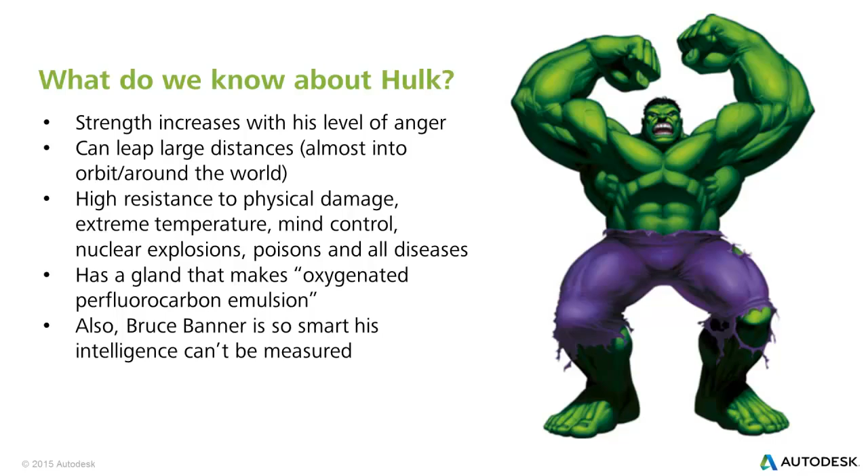Has a gland, oh this is a good one, that makes oxygenated perfluorocarbon emulsion. I guess that's a fancy way of saying he can breathe underwater. And also, when he's Bruce Banner, he's so smart that his intelligence can't be tested. That is pretty smart. So what actually matters for us? Well, none of that. All that really matters is that the Hulk is a big fatty.

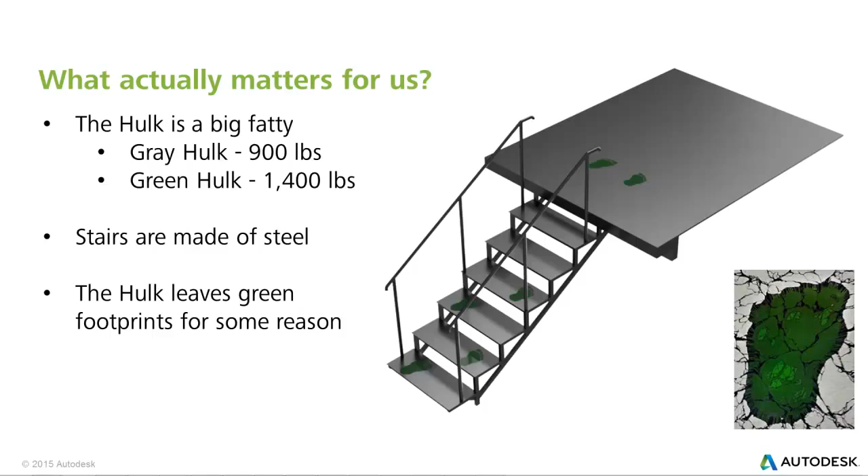So like all of these superheroes I'm finding out, there are multiple versions. Gray Hulk, which I didn't know exists, is a 900-pound fatty. Green Hulk can get all the way up to 1,400 pounds, so that's what we're going to be looking at while he walks his way up some steel stairs. And also he leaves green footprints, because why wouldn't he leave green footprints?

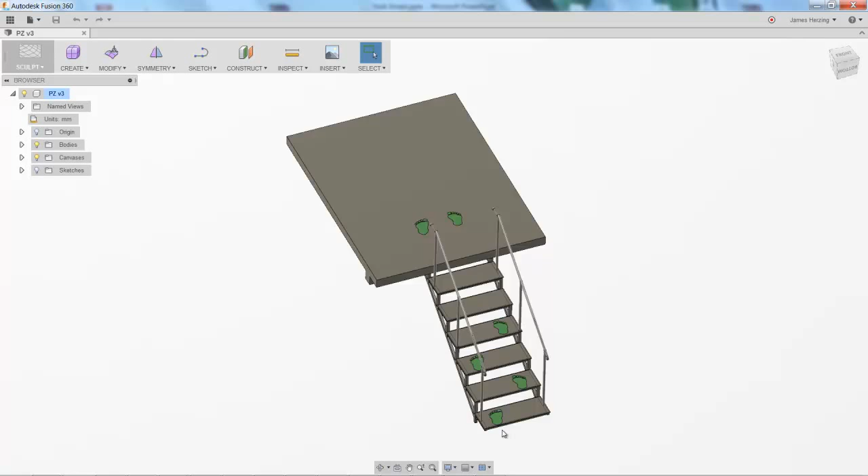So here are our stairs inside of Fusion 360. You can see that I actually have gone ahead and did a split face command on 4 of the stairs, and then he's going to jump up and land on the top landing point. So a simple command is going to allow us to simplify our model. That's one of the big parts about simulation, right? Keeping things simple. So instead of modeling the Hulk, we can just model his footprints and use forces to represent all of his fat. So we're going to go ahead and open up our IGES file.

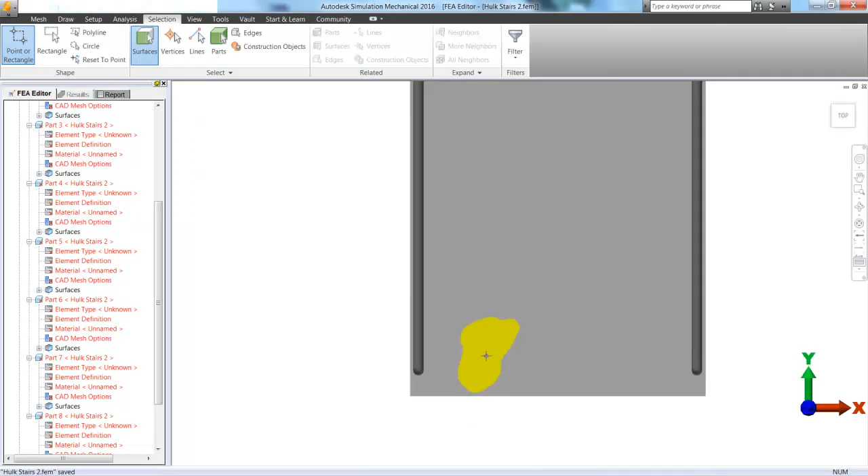And when we do that, we can see it here in Autodesk Simulation Mechanical. And instead of doing a linear static stress analysis, we're going to define it as a mechanical event simulation, and start defining our loads and boundary conditions.

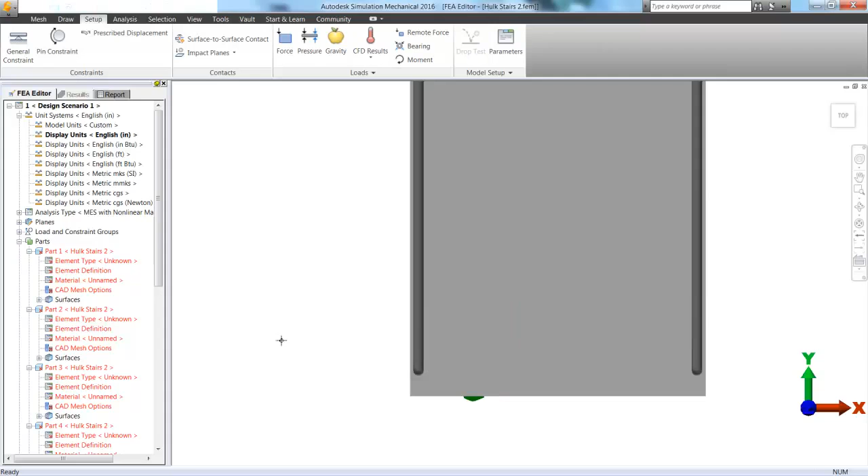So if I just grab all of the surfaces that make up the Hulk's footprint, I can go to Setup and choose Force and define a magnitude of minus 1,400 pounds of force, clearly in the Z direction. But also I'm going to check the box that says distribute magnitude across all the surfaces, so it's distributing across his foot. We're going to do the same thing here for his next footstep, adding a force and typing those values in, but this time we're going to change the load case or load curve number to 2.

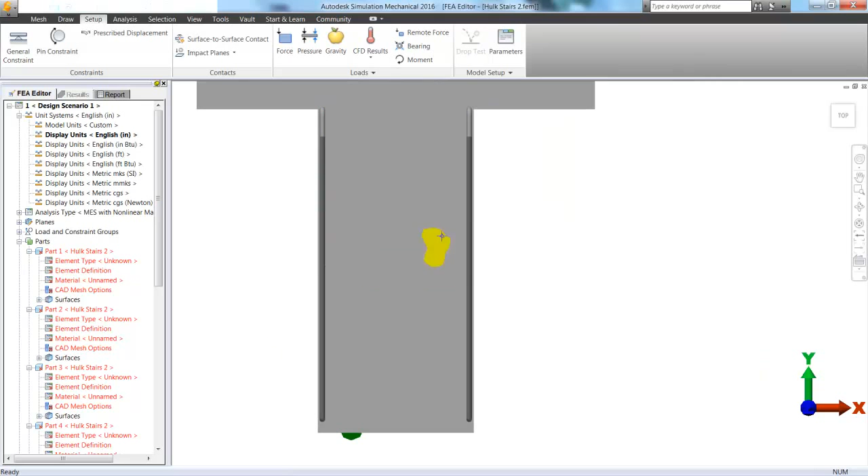And so now let's speed this up a little bit. Nobody wants to watch me do this over and over again. But we're going to do this for the other footprints and where he jumps and lands. And each one of these is going to get its own load case to define how it's acting over time. So it's basically going to be like him taking steps up the stairs, and then jumping at the end and landing on that top stair.

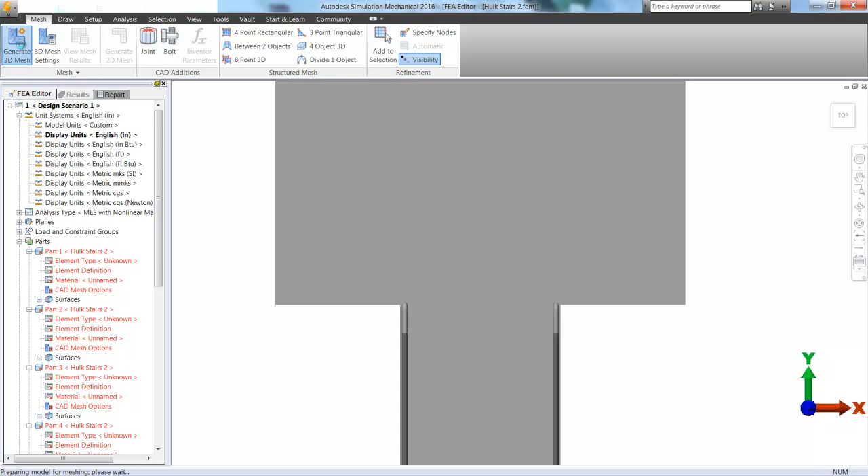So next let's go ahead and choose to generate our mesh. And you can see our force arrows are now there. We can see a more refined mesh around where his feet are. And now all we really have to do is add some materials to these parts. And again, these are steel stairs. So if we right click and choose Edit, as always I'm going with A36.

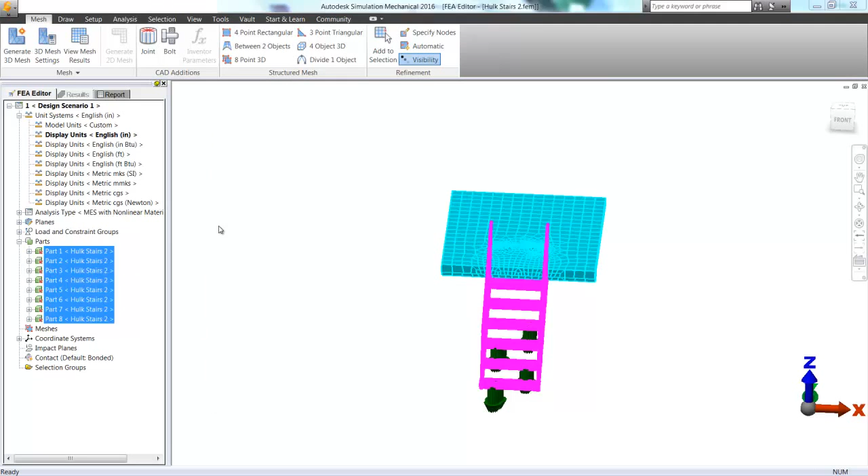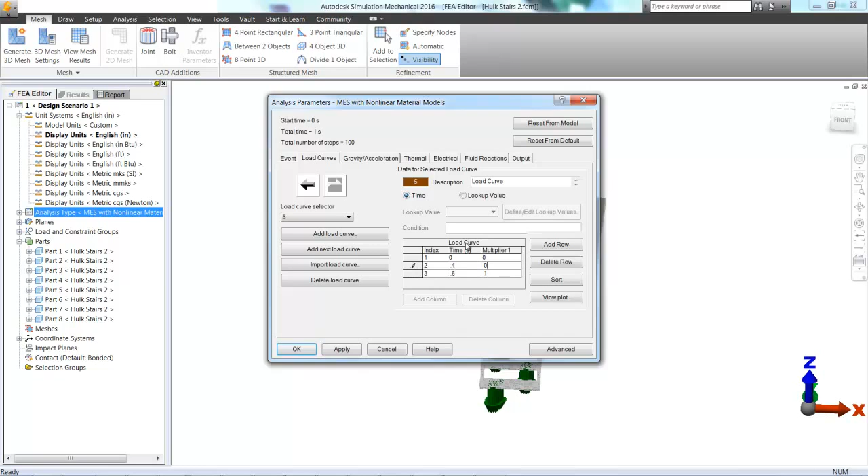And now if we go in and edit our parameters, we can also define the number of time steps that we have. So let's go ahead and do that. And now we're defining each load curve. Again, speeding up so you don't have to see all of it. All I'm doing is saying what time the load is going to start being applied and what time it's going to end being applied. So here we go, apply, apply, apply. And into the results we go.

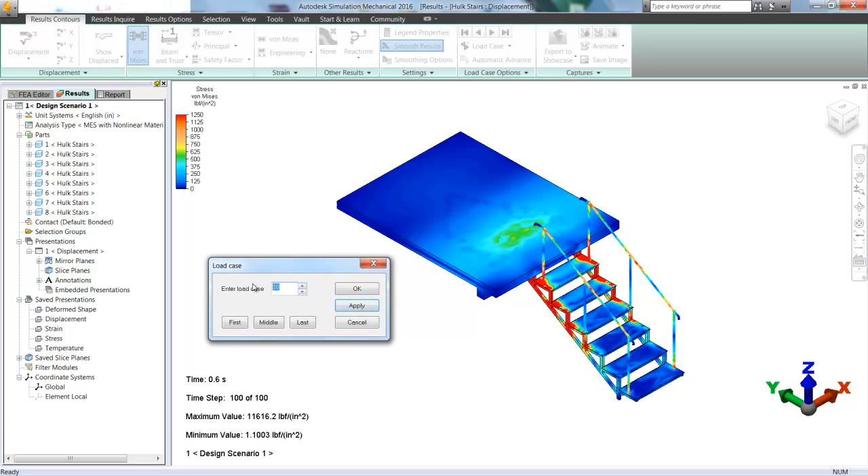Now I didn't show us setting up any of our boundary conditions, but all I did was add some fixed boundary conditions anywhere that the posts would be hitting the ground, and a couple where the posts would be attaching to that top step. You can also go through and look at different loads, but let's take a look at a video instead, so you can see how this is actually going to be flexing as he takes his steps, or you can see the increased stress in each stair as he walks up it, jumps, and lands on there.

So that's all there is to seeing how Big Fat Hulk walks up the stairs, and then jumps on the top one.